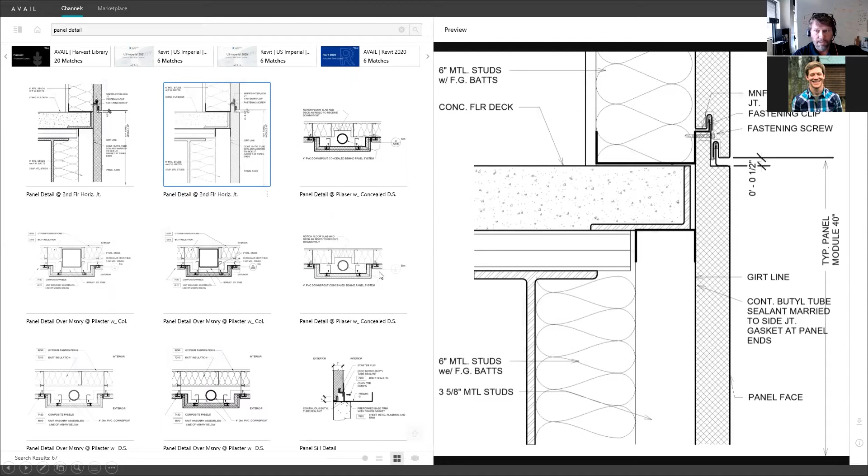So this was a big focus again of the platform, all the work being done on search simplification, a lot of attention to these visuals and being able to produce them and make sure that they're front and center as part of this process of looking for and finding the information that you're looking for.

So we took everything that we had done, all of that work, focused on it in a very general way, and we're simultaneously already working on applying those same concepts and principles to very specific things inside of Revit. So we had already built a little utility that we called Harvest, which was about trying to abstract details out of an RVT file so that you could index those as individual RVTs.

So we basically dusted that off, and we knew that the way our customers are managing their Revit libraries, families, I like to say, are pretty easy - those are discrete little files or little RFA files. So we obviously handle that. The tougher content management problem inside Revit is everything that's not a family. So almost everything else has to be stored in an RVT file or a template file of some type.

So we really went to work, dusted off that Harvest, and what became Harvest 2.0 was this kind of, let's apply our learnings and go start to solve specifically some of these problems around managing this content that's stored in what we call container files. I've heard most customers call them container files, container libraries, warehouse files, whatever you end up calling that. It's basically everything that's not a family that you're forced to store in an RVT file.

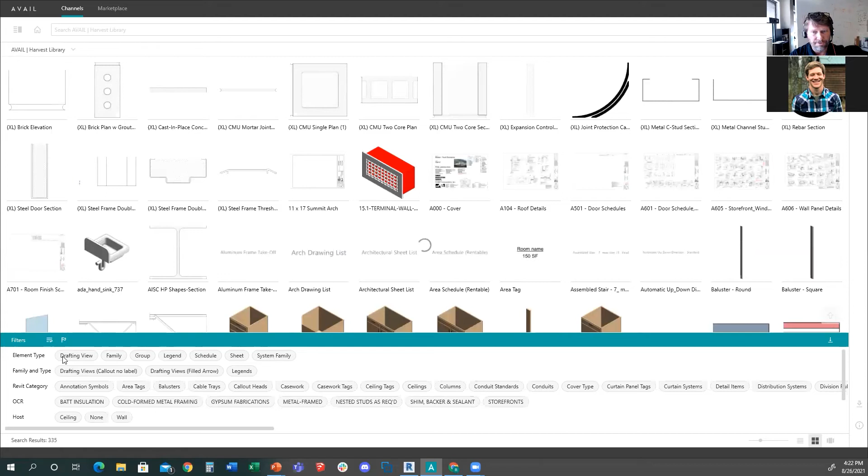There's 335 items in this channel. As you can see down here in my filters panel, this ranges from drafting views and families all the way up through sheets and system families. Each one of these items shows up individually. I'll just show you drafting views because those are nice visuals, or sheets.

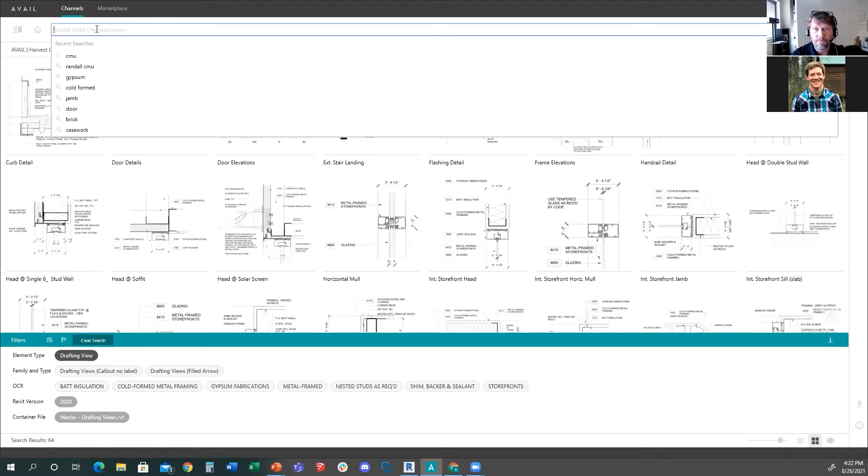Here's my drafting view library. I can see these as individual items, and they're all searchable. So if I knew I was looking for that solar screen, I can identify it, select it, and if I open my preview panel, I'll get a high resolution preview. This is all zoomable so you can see it.

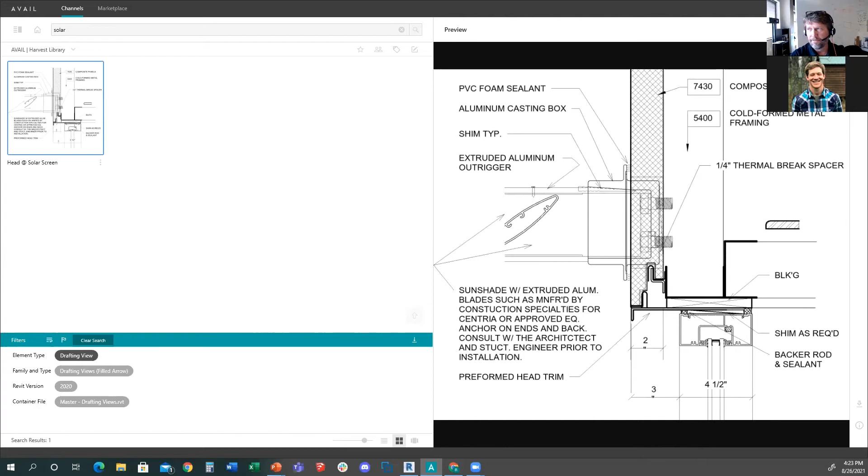Again, we get a lot of kudos and feedback from our customers because of things like this—you have a PM who isn't using Revit that can still get in here and see this information without even having to be in Revit, or even having Revit installed on their machine, to be able to see this. That abstraction—at the end of this I'll show you we're working on mobile, and it'll make a lot of sense now that we're abstracting this data away from the actual RVT files, that you can see this on mobile devices. Very powerful from that standpoint.

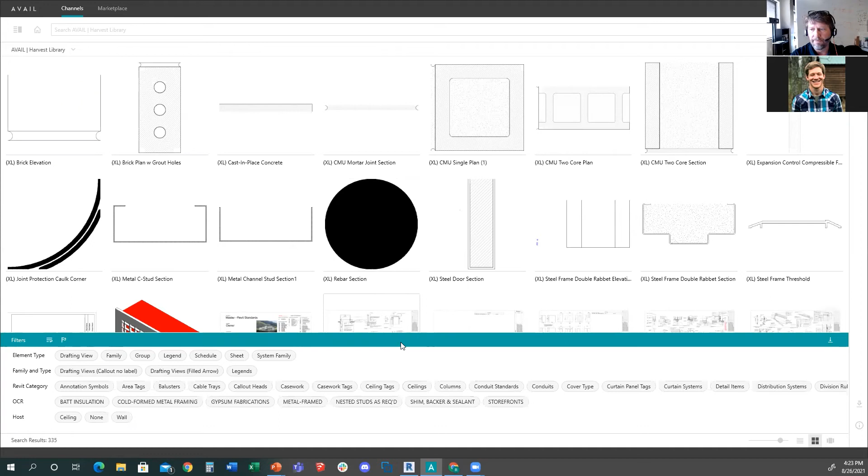All of this information, including these tags, came in automatically as part of the harvest process. So all this information is being driven out of the container library. You can have your own custom parameters that you want also being stored in there and pumped into AVAIL, just to make this a nice, easy process for getting back to this information. Very powerful from that standpoint.

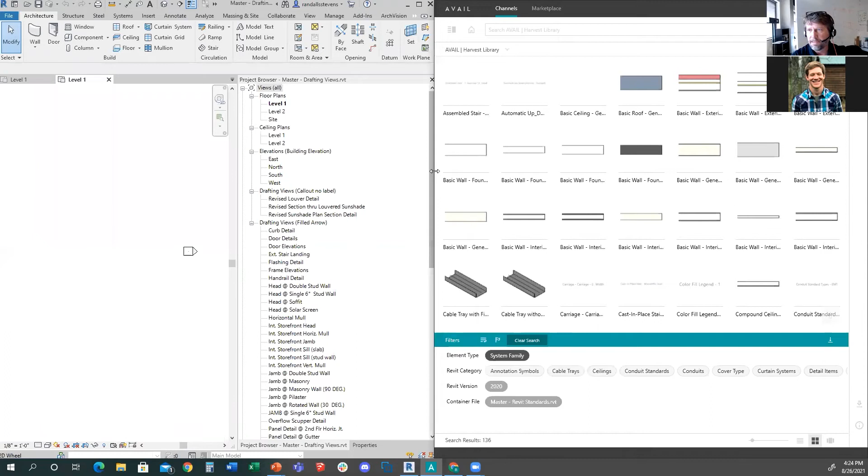What I'm going to do is start with these system families—so wall types, any of your typical system wall families. Let me dock this over here on the right side of my screen, and I'm going to bring Revit up and show you what this means to use this inside of your Revit projects.

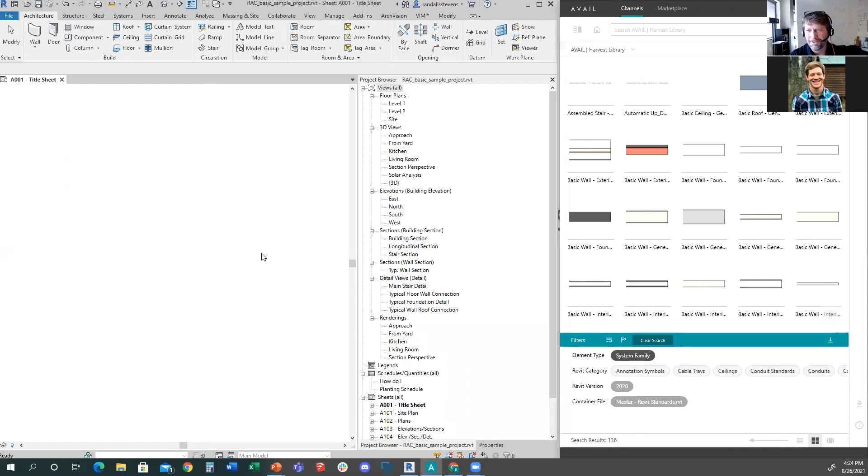Let's do this—let me actually go back and open a sample project. All right, so I'm just going to open up the sample project that we're all tired of looking at. Anybody who'd like to supply us with a really cool new demo project, we'd be happy to take it. I, for one, would like to start using something besides this project.

Let me just go into a 3D view here. For those of you on the call that are AVAIL users already, we have what we call the AVAIL browser that runs inside of Revit. If I select a piece of content here in my library, you're going to see this little icon take a couple of seconds—that's the time it takes to open that container library to get this data. So in this example it may take a few seconds because it wasn't quote unquote hot, but now that it's open, it's immediate when I go from one to the other looking for that information.

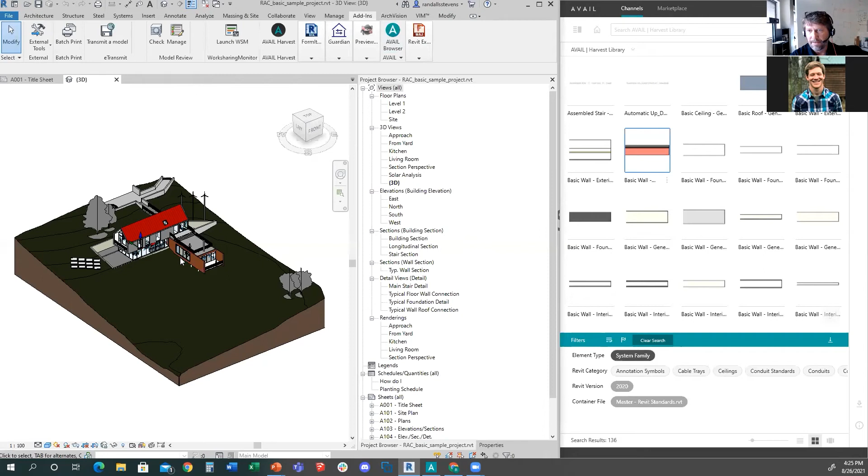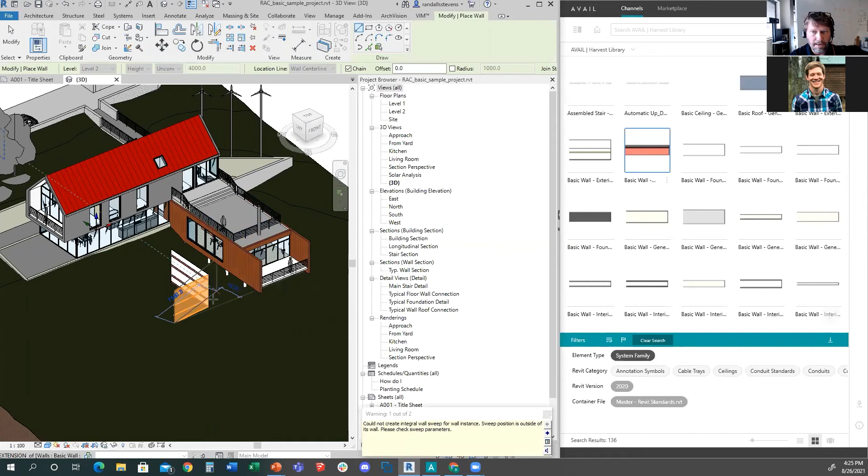What I want to show you though is that you don't have to use this browser anymore. So I'm just going to turn it off, but I'll still use one of these system families as the example. Here I am on my project, and I could take that system wall family, simply select it, drag it over onto my current project, and AVAIL is loading that out of the container library, bringing it into the current project, and then putting me in modeling mode so I can begin modeling with that wall type. Very powerful to think about doing that.

If I were to go over here and create a sheet, and let's go over here to my library and go into, say, some of those drafting views again.

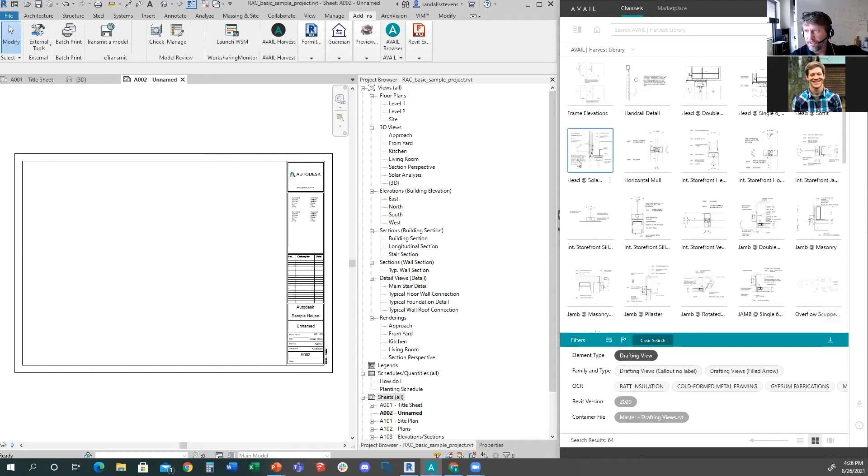Same thing, so I can find my drafting view that I'm interested in using. I've got Guardian turned on here monitoring what I'm doing, but I can just drag and drop that directly from the AVAIL interface library into my project. AVAIL is loading that, plucking it out of that centralized container library where it was stored, bringing it into the current project, and it's going to put me in placement mode to let me drop that right on the sheet. Pretty powerful from that standpoint.

This is what I was harping on about the simplicity. I didn't have to pull up an interface, see everything else that was in that container file, use all of the advantages and tools we've built around AVAIL for organization, search, simplifying, managing, seeing, and then simplifying what it means to bring this information into the project.

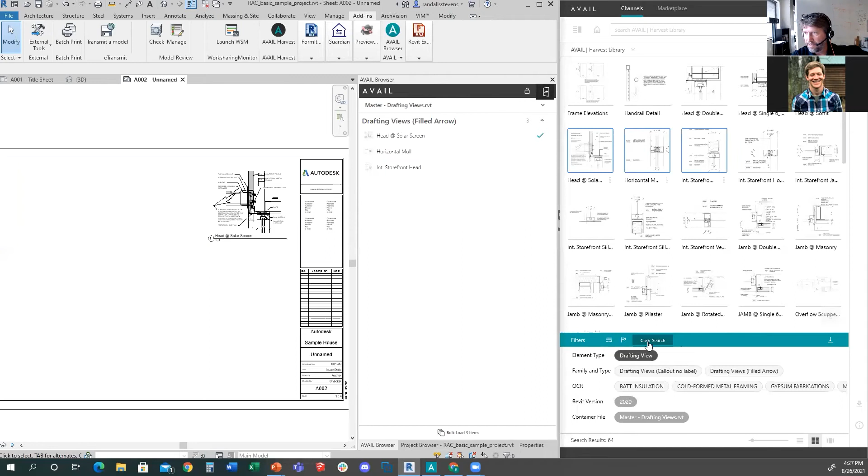The other thing I will show, if I turn the browser back on and do multi-select over here, this is the multi-select, and as you notice down here below, I could bulk load those all at once into the project. I do have content here from multiple container files. If I scroll down here in my tags, you'll see that everything in this channel is coming out of 2 different container files.

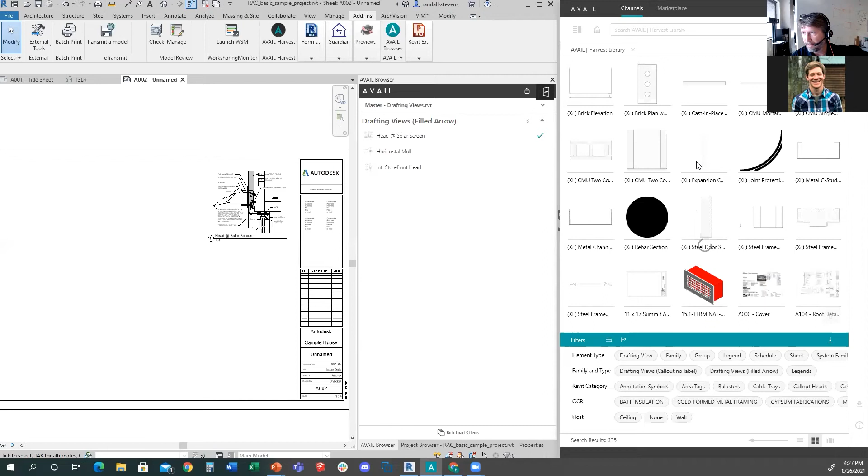So if I were to look at what's in the Revit standards, there's those legends - oh, there's lots of data. So I could go to a system family. Let me go back here - if I were to choose a system family, let's see if I can just find one. There's some wall types, a wall type, and I'll scroll down here and find a drafting view that's coming out of one of those other container files. There we go - multi-select both of those. What we'll see in this project with one click.

It seems like your audio switched from your headset to your camera, maybe. Yep, I'm not sure why that switched, so I just went back. Let's see if I can get my microphone back to the one I want. Sounds like it might be the right one now. Yeah, sounds like the right one now. All right, hopefully can you hear me now, Todd? Yep, you sound good, back to the right mic. Okay, yep, I'm not sure why that dropped.

All right, so hopefully that makes sense, right? The bulk loading. So now let me switch to the publishing side of this and the management side. I'll show you really quickly how easy this is to work with.

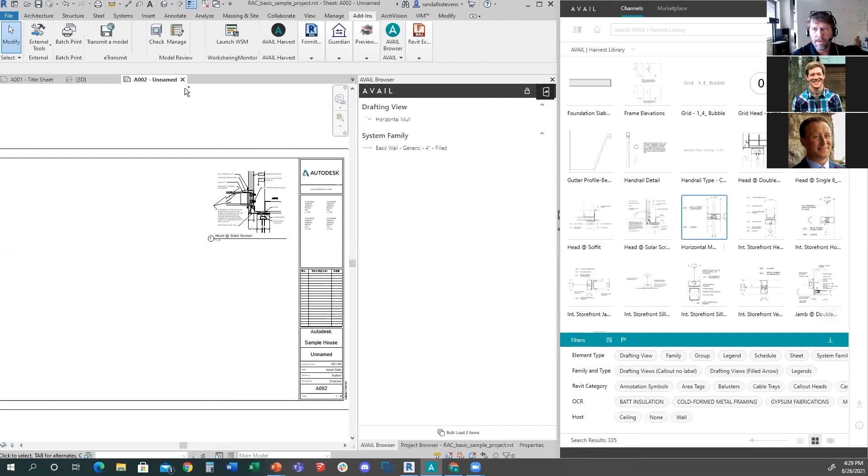What I'm going to do is put Revit full screen, and if I go up into my add-ins, you'll see that I have an icon here called AVAIL Harvest. So I'm just going to click on that, and it's going to basically pop up an interface that is looking at my channels inside of AVAIL. So let me pop AVAIL back up here and show you what I've done - let's go full screen with this.

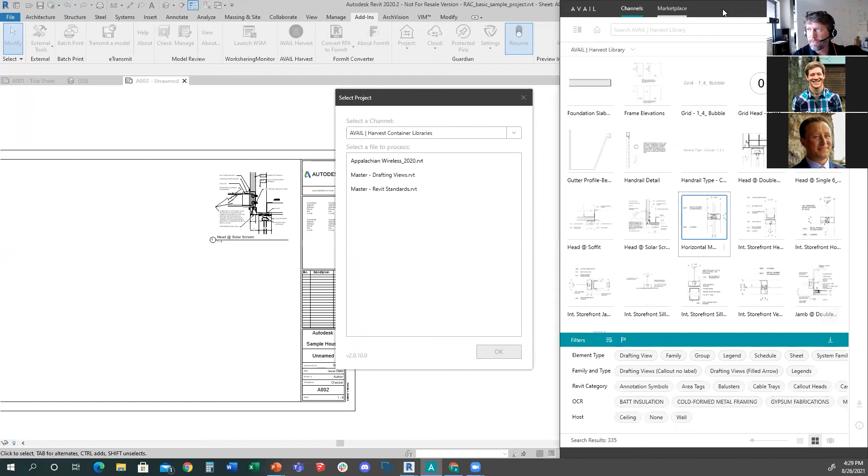So I'm going to go back home. I have another channel that I created called my Harvest Container Libraries. If I go in there, you'll see I've got 3 RVT files - these are my container files that I use to demo and experiment with. So all I had to do was index those into a channel of AVAIL. So here's where I manage those. And then ultimately I created another channel that was for the output, for my users to be shared as part of the library - that's what I was in earlier, this Harvest Library channel. So those are my 2 channels.

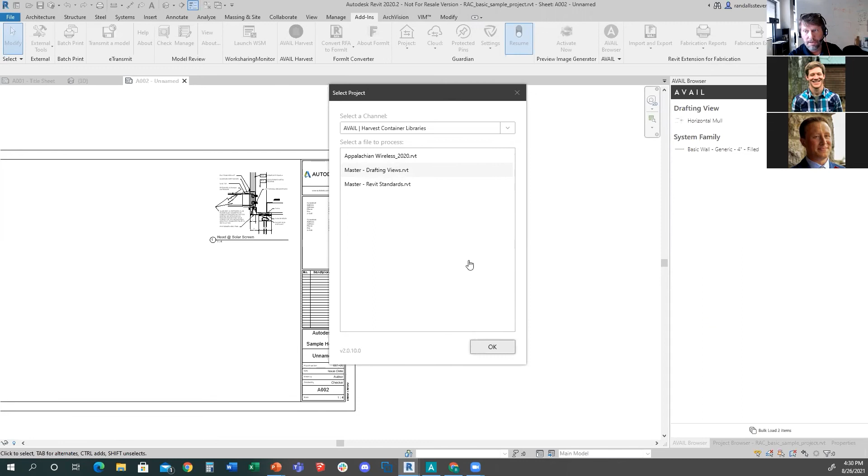What that ends up looking like here in this interface inside Revit is you basically point to the channel where your container libraries are. There's those 3 container libraries. I'm going to choose that I'm going to work on my drafting views. And what Harvest is going to do is actually open that as the live project. So you could either be doing your editing from here or have done that and are ready to just open this up and publish from. So it's now open - that's my Revit container library file opened in Revit.

And now it's asking me, where is my destination? Basically, where's the output going? So I'm going to publish it. And I'll use the word smart - it'll remember where you published each of those containers to.

By default, if you're just continually publishing, you don't have to worry about re-choosing those settings. It'll remember them. So here you can see I'm publishing output to that Harvest library. I could switch where I'm publishing that info to. The only other choice you have is whether you'll leave that in the central container file.

Or do you want Harvest to bust those out into individual elements on the consumption side? I'm going to leave them in that central container file. Then we'll give you the choice of what to publish. By default it checks at the high level, so here are groups, here are drafting views, but I can drill down and choose to publish them all, or just publish these two because I've updated them. I'm just going to say start.

What you're going to see is that it will start publishing. I've already got those published, so it's not going to mean a lot. While that's doing that, let me pop over here and show you that on the reporting side, some reporting tools I've just been experimenting with, but you'll get the idea.

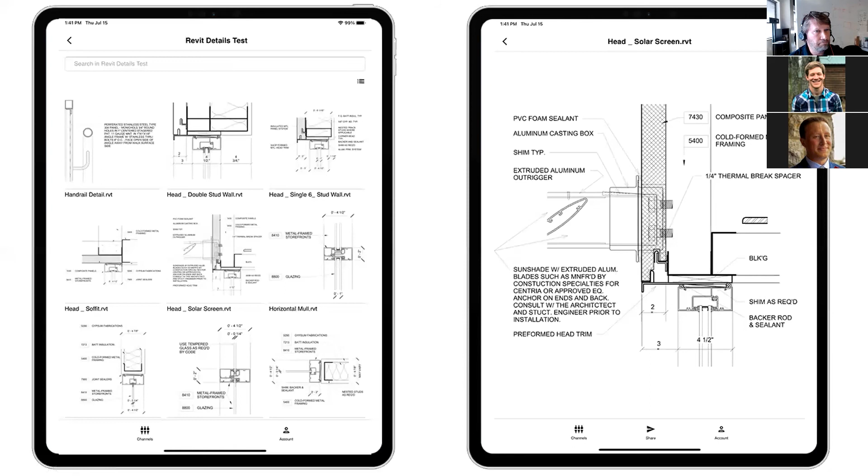You'll start to see us rolling these new mobile features out sometime this year, before the end of the year. So I think that's all, that's the highlights of it. Happy to answer any questions.

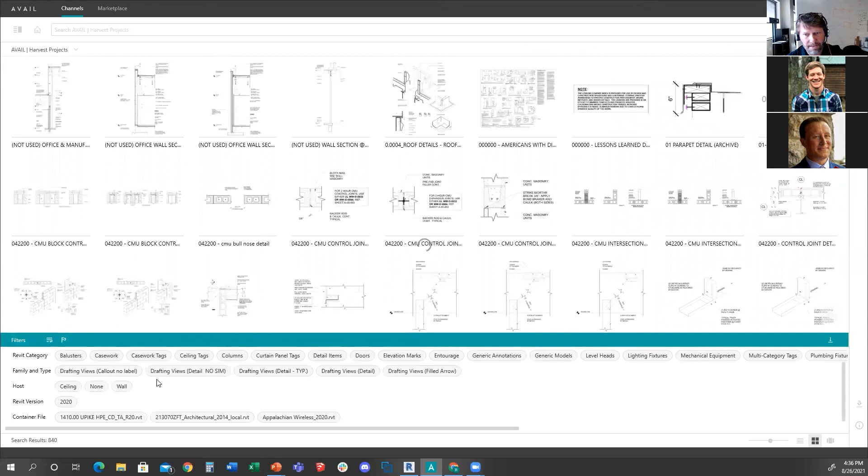What I'll say is that because we're touching these project files and all this data, you can start to imagine that the next step is to do this not just with libraries, container libraries, but actual projects. So here's some examples where I've taken project files and abstracted data away from that — sheets, views, schedules, legends — with the ability to see an entire sheet and zoom in on all of that.

Let me go back over here and show you that, I didn't show you any sheets yet. Any questions come in, guys? Todd, Abram, are you helping me? No questions so far. All right, now's the time, because after I show you this, if we don't have any questions, I'll wrap it up.

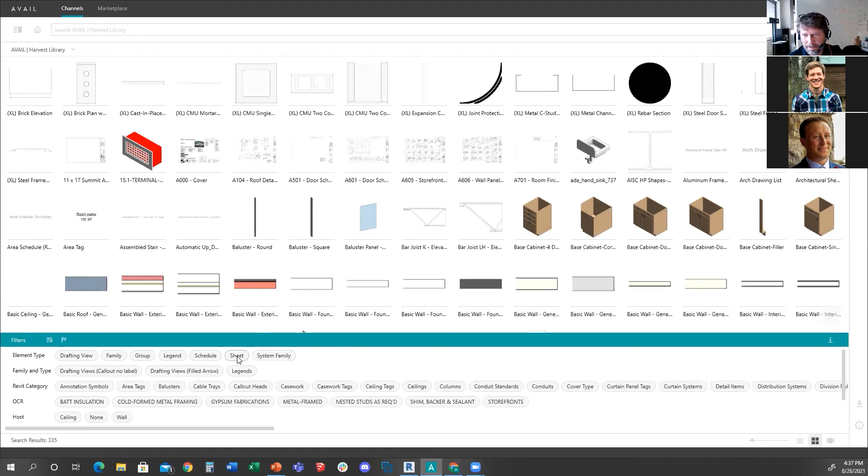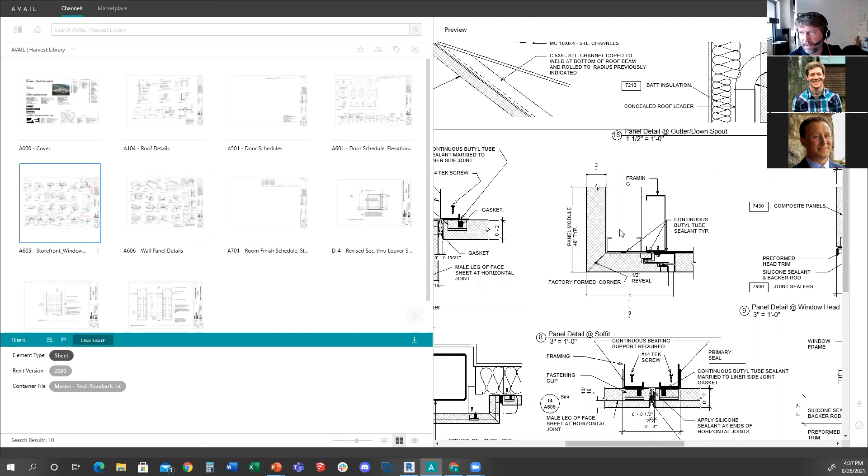Let me drill down to these sheets. So here's some sheets. If I open up that preview panel, we'll see a preview of that sheet, and it's high enough res that I could zoom in and read this info, all without having to have Revit even installed on the machine. I'll be able to do this very same stuff from mobile moving forward. So lots of new and exciting things we're working on around projects and project information, and being able to get back to it.

That's all I have prepared, but I'm happy to hang around here and answer any questions, or see what's on your mind.

All righty, let's see here. A question came in: how does AVAIL handle multiple Revit versions?

So whenever we have to open that container file, there are two ways to think about this: where it's stored and which version of Revit it's stored in. By default, when we open that, it's converted to whatever version of Revit you're working in. So if you're in Revit 2020 and the container file was Revit 2019, the act of us opening it with the Revit API means it's being upgraded, at least in that session, to open it and pull the data out. So that's on that side.

If your question is about the usage side, the same thing applies. You're not going to be able to publish your data in a Revit 2022 container file and then open Revit 2021 and try to get that data in there, because we can't transfer data from 2022 backwards. So as long as your container library is in the version you're working in or below, everything's good, and your users don't have to worry about which version they're working out of.